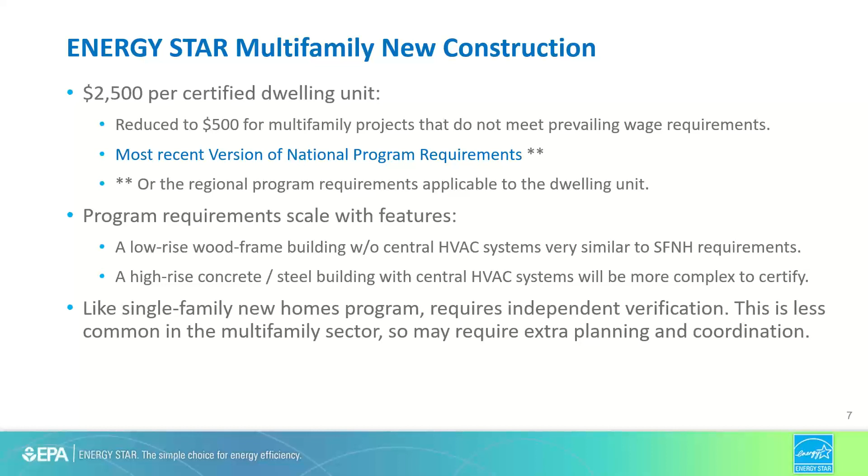The point is that the multifamily new construction program handles buildings across the entire spectrum of the sector. It's also worth noting that, like the single-family new homes program, the multifamily new construction program requires independent verification that our requirements have been met. However, this has historically been a little less common in the multifamily sector, things like measuring duct leakage, infiltration, ventilation airflows, and commissioning HVAC systems. So certification might require some extra planning and coordination than what project teams are used to.

Finally, let's touch on the manufactured home sector. These are homes that are built in the factory that are governed by the HUD code rather than site-built codes. New manufactured homes achieving Energy Star certification can qualify for the $2,500 tax credit. Again, homes have to meet the most recent version of the Energy Star program requirements. The current version for manufactured homes is version 2.

However, version 2.1 was recently proposed in response to the new federal conservation standards by DOE that are significantly more stringent than the prior code. The cornerstone of the proposal is a consistent, well-insulated envelope that outperforms the most stringent code insulation and window requirements by at least 25% for single-section homes and 5% for multi-section homes. In addition, multi-section homes have to choose one equipment upgrade package: an electric heat pump, a high-efficiency gas water heater and gas furnace, or a heat pump water heater package. We're currently reviewing stakeholder feedback and we hope to finalize this new version by the end of the year.

In the prior slides, we talked about how the tax credit is tied to National Version 3.1 and 3.2 for the single-family new home sector, depending on the year. That might be making you wonder exactly what's required to meet these versions, and that's what we'd like to talk about next.

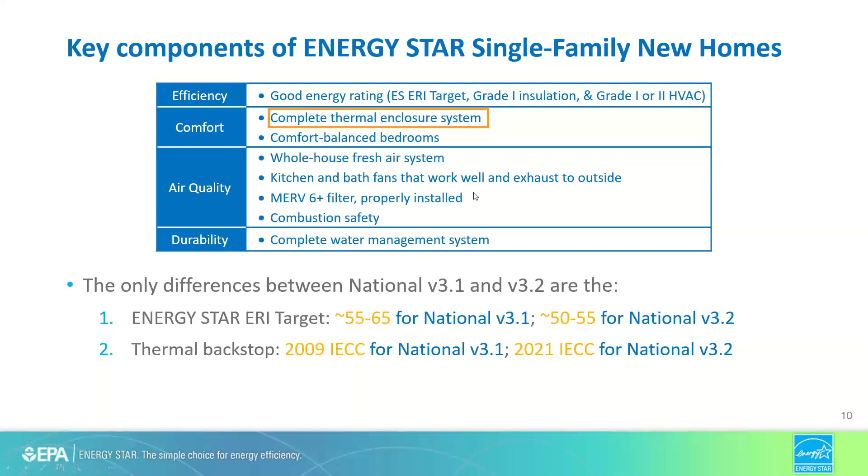Hey Dean, do you want me to take over if you're struggling? I'm still doing all right, but I might pass it off to you in just a minute, Asa. Okay, yeah, just let me know. Thanks.

It all starts with just doing a good energy rating. Simply put, you don't know what you don't inspect. By some estimates, more than 80 individuals representing over 24 trades will touch a home during its construction. Site supers have a lot to keep track of, and they're not always going to have the bandwidth to look at every durability and efficiency detail. And it certainly won't be the code inspector who's paying attention to all this. That's where an energy rater comes in. It's a critical extra set of eyes that should reduce the liability of a builder by keeping tabs on these sorts of details. In addition to visual inspections, it's the rater who has the equipment and the expertise to measure key features like infiltration, duct leakage, ventilation airflow, and installed HVAC performance.

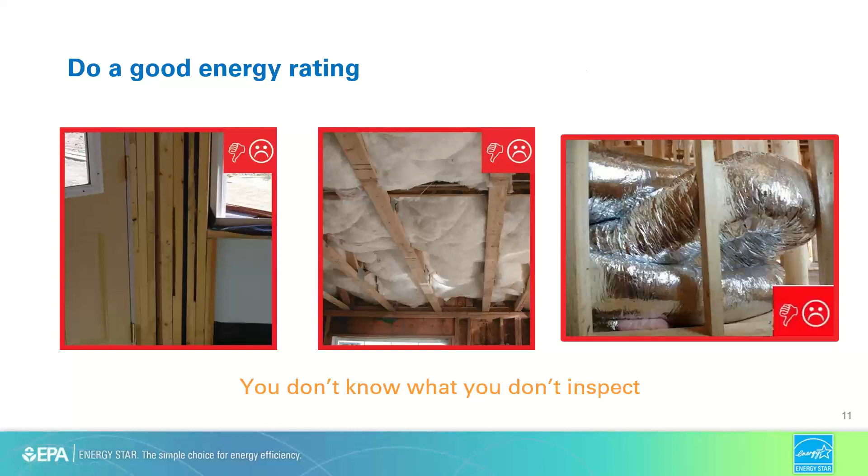So this is an easy but critical first step. Every builder can and should be doing an energy rating, otherwise you're just flying blind. Fortunately, we know that a lot of builders have taken this first step.

RESNET reported that close to 300,000 homes were rated in 2020 alone, and that number has only increased since then. Now we've got another 700,000 or so homes to go. But what this means is that 300,000 homes are already meeting this first requirement to reach certification just by doing an energy rating.

Now, an energy rating is just an assessment. So while it's a critical first step, it doesn't mean the home is good. A terrible home can get an energy rating, so it might get a score of 130. That's better than not knowing that it's 130, but it doesn't make for a good home.

A good energy rating means a decent ERI score. And that's why Energy Star defines an ERI target. Like I said earlier, aiming for something in the range of 50 to 65 will get you to Energy Star in almost every state in the country. And the average ERI of all rated homes last year was 58, squarely in that range. That means of those 300,000 rated homes, on average, more than half of them, or 150,000 or so, are probably already meeting the ERI target that's required for Energy Star certification.

What sort of measures allow you to hit the Energy Star ERI target? Well, a good place to start is by looking at the Energy Star reference design. These are the features that are used to set the target for each individual home. If you use all these features in your home, then by definition, you'll be pretty close to hitting the target. Remember though, if you see something here that you don't like, you can use other efficiency features instead, as long as you hit the target.

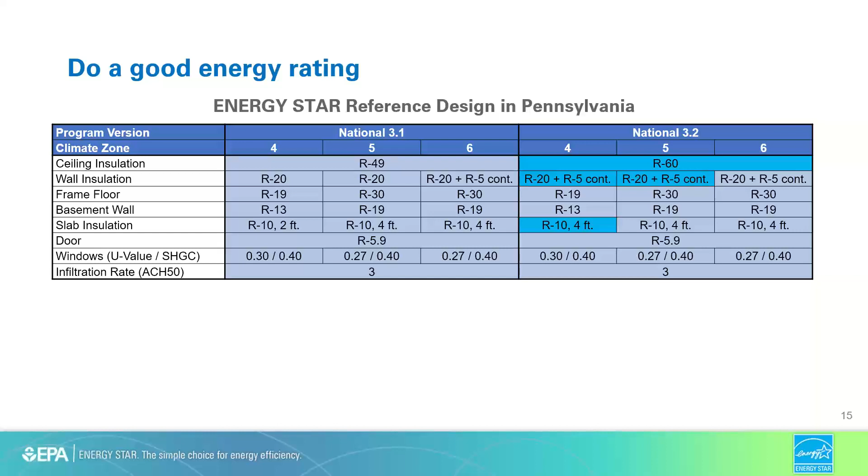So let's start with the enclosure. For National 3.1, the insulation is aligned with the 2012 IECC. For National 3.2, it's aligned with the 2021 IECC. The windows and doors are aligned with the latest Energy Star spec for windows and doors at the time that we created these versions, and the infiltration rate is 3 ACH50 across the board.

For the HVAC system, there's an increase in air conditioner efficiency with version 3.2 and some refinements to the heating equipment efficiency, both furnaces and heat pumps. These were generally aligned with the latest Energy Star product specification at the time the 2 versions were developed. And the equipment is paired with ducts that are in conditioned space and a programmable thermostat as well.

And finally, we have the water heater, which goes from a storage water heater in version 3.1 to either an instant gas water heater or a heat pump water heater in 3.2, plus Energy Star refrigerators and dishwashers, and an upgrade from 90% CFL lighting to 100% LED lighting in 3.2.

Now, I know that's a lot to take in, but just glancing at these specs might start to give you an idea of how close you are to hitting our performance targets. And remember, for the tax credit, version 3.1 is generally required until 2025, and version 3.2 is going to be required for 2025 and beyond.

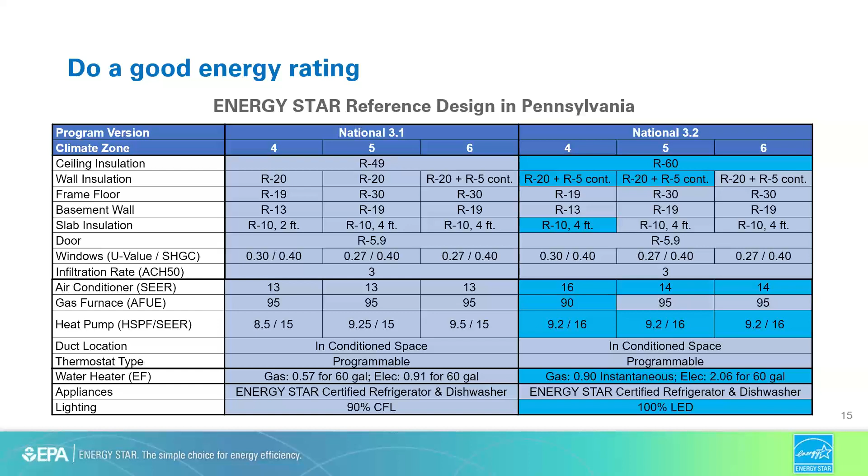Now, Standard 301, the standard for doing energy ratings, already has mechanisms to assess more than just the score alone, such as insulation installation grades. So to us, a good energy rating also means achieving grade 1 insulation installation.

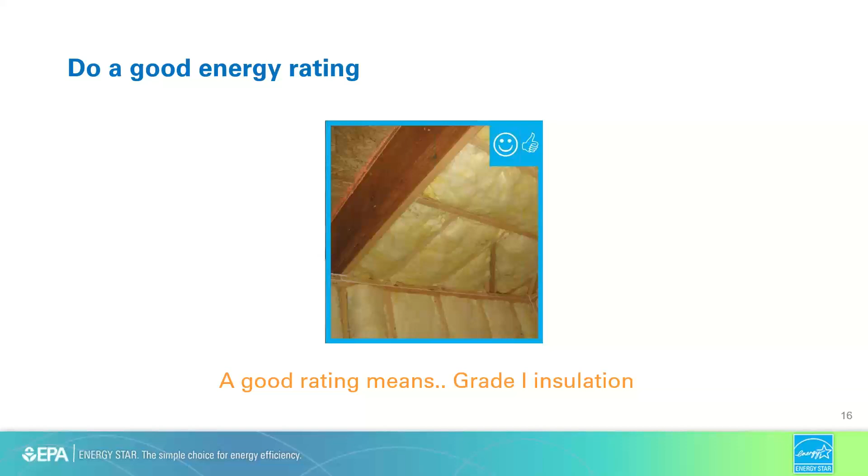This helps a builder get the R value that they paid for, and it reduces the chance of comfort complaints. If you're paying for, say, an R15 high density batt, then you should be expecting that your installers are actually delivering R15 performance, not installing it so poorly that you're getting something like R13 instead.

So that's really important. And now HVAC grading helps a builder ensure that their heating and cooling systems were properly designed and installed. A grade of 1 means that the system was installed really well. A grade of 2 means it was installed okay, so not great, but not terrible.

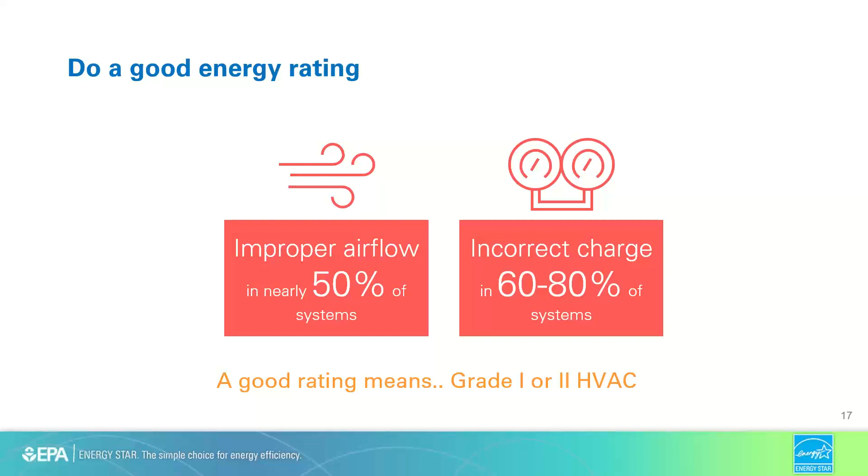This really shouldn't be taken for granted. Studies have shown that there's improper airflow in nearly 50% of systems, and incorrect charge in 60 to 80% of systems. So unfortunately, you can't just assume that everything is okay. You need to check.

Now, why should you care if airflow and charge are correct? Well, the first reason is that HVAC installation impacts efficiency. Consider a builder who's paid for a 16-SEER air conditioner. The SEER rating, based on a standard lab test, is never going to change, but the installation quality will impact the on-site performance of the equipment. A properly installed system will maintain that rated efficiency, meaning the home will get 16-SEER performance, whereas a poorly installed system will degrade that rated performance. The system is still rated 16-SEER, but the actual field performance might be closer to that of a 14-SEER system.

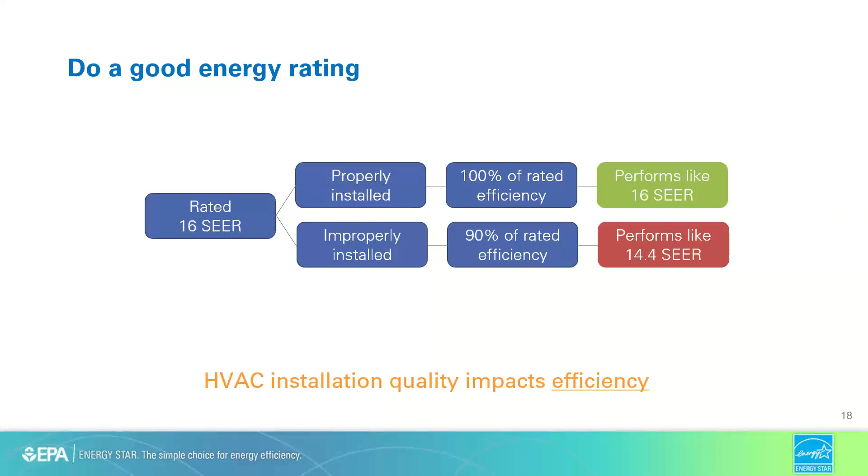So what does that mean? It means more energy and higher bills than what the builder paid for. And that's not even the worst part, because HVAC installation also impacts capacity. That means the amount of cooling or heating that a system can produce. In other words, the 3-ton system they paid for should actually deliver 3 tons of cooling capacity rather than 2.8 or 2.9 from a poorly installed system.

Now, a small change in capacity might not seem like a big deal, but tell that to the homeowner who calls you on the hottest summer day when you need every last bit of cooling power that was promised. So efficiency is great, but eliminating a comfort complaint or managing humidity better, that's priceless.

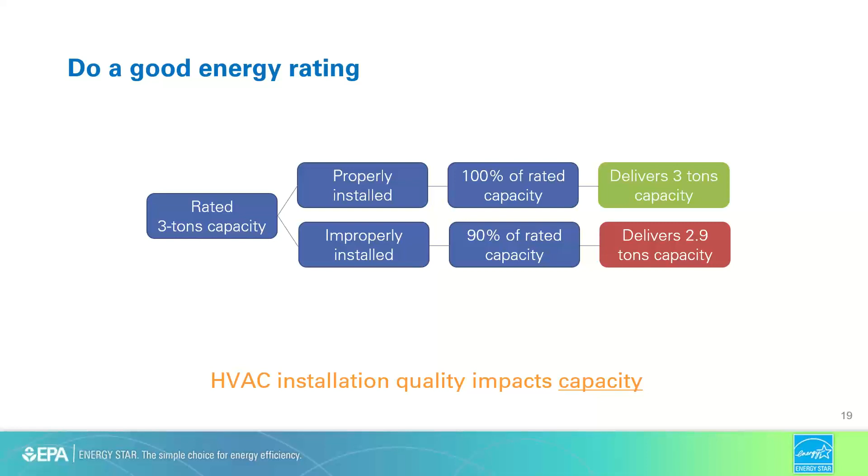It's because of these common installation defects and the impact that they have on performance that we helped spearhead the development of something called Standard 310, a standard for grading the installation quality of HVAC systems. And as you may know, there are 5 key tasks in this new HVAC grading standard. They include a design review, a total duct leakage test, a measurement of blower fan airflow and blower fan watt draw, and an assessment of refrigerant charge.

Doing these 5 tasks gives you a wealth of information about the HVAC system that can help save energy and reduce your risk as a builder or developer. But on top of that, HVAC grading makes it easier to certify ENERGY STAR homes and apartments in 4 key ways.

First, it integrates most of our ENERGY STAR HVAC requirements directly into a good energy rating, so there's less stuff that you have to do specifically for ENERGY STAR. Second, and this is a big one, for systems that are eligible to be graded, it doesn't require the use of a credentialed HVAC contractor, which has been a sticking point for some of our partners in the past.

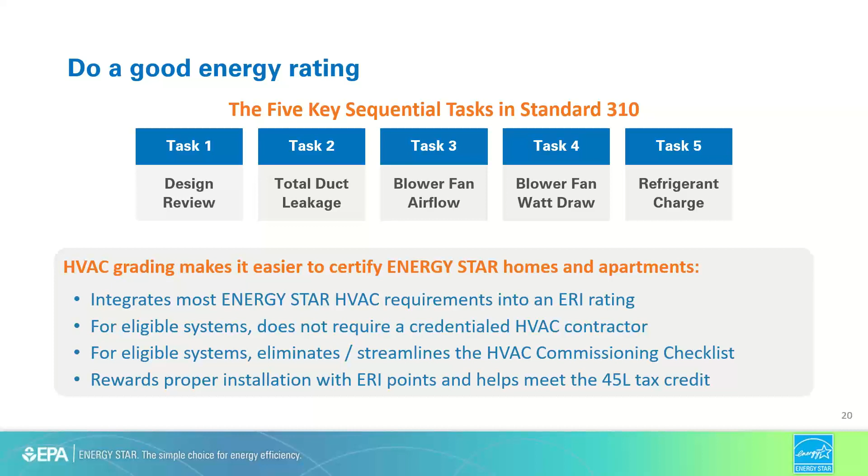Third, this also means that it eliminates the completion of the HVAC commissioning checklist. And finally, it rewards proper installation with ERI points, so that can help you meet the 45L tax credit.

So within ENERGY STAR now, we have 2 tracks for completing the HVAC design and installation requirements. There's what we call Track A, HVAC Grading, which uses this new standard. And there's our old requirements called Track B, the HVAC Credential Track, and that relies on the use of a credentialed HVAC contractor.

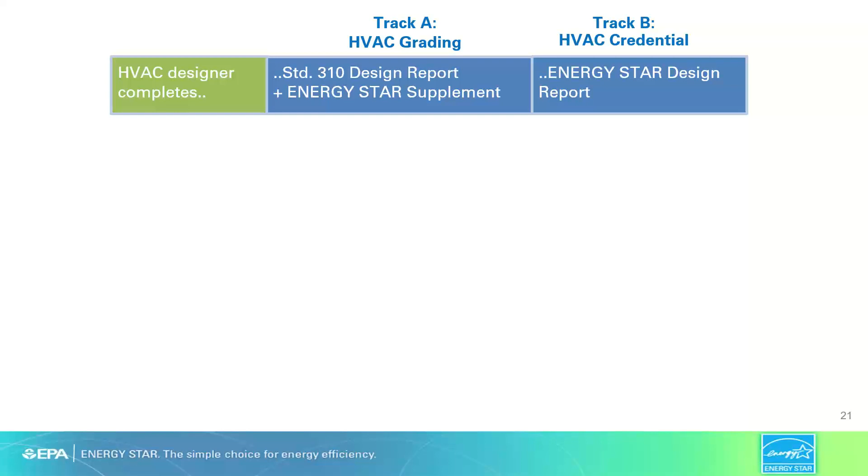Let me just compare these 2 tracks side by side. First, the HVAC designer completes their design report. For the HVAC grading track, they'll complete a standard 310 design report with an ENERGY STAR supplement. For Track B, they'll complete the old ENERGY STAR HVAC design report. Either way, the designer is filling out design documentation.

In both cases, the rater is going to complete the rater design review checklist, but in Track A, they'll do a comparison primarily using Standard 310. In Track B, they'll do the design review just according to our ENERGY STAR specific requirements. Also, just in Track B, the rater will have to verify that the contractor is credentialed, because that's a key part of that track.

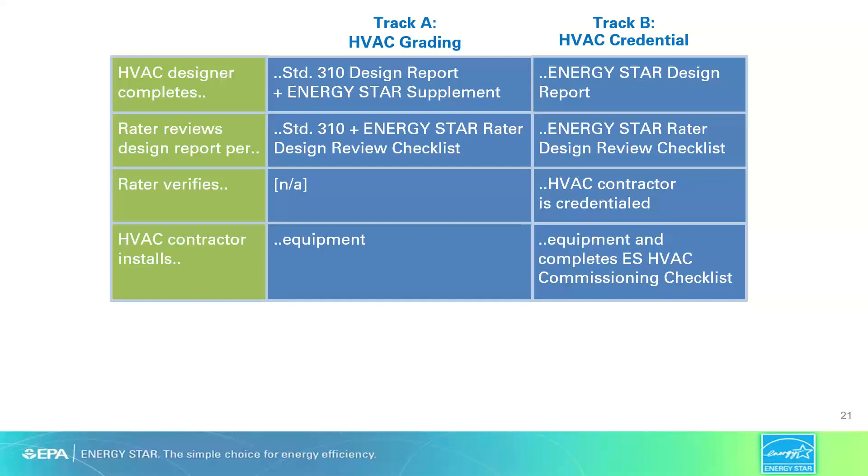Now let's move into the field. The HVAC contractor will install the equipment in Track A. In Track B, they'll do the same, but then they'll also complete the ENERGY STAR HVAC commissioning checklist. Again, that's just required for Track B.

For the rater, in both cases, they'll complete the rater field checklist. In Track A, they'll complete the total duct leakage test and 3 new field tasks, and they'll have to get certain grades. In Track B, they're going to verify total duct leakage limits as well, but then they'll measure the static pressure, and they'll have the option of collecting the HVAC commissioning checklist. Now, you can use either track to certify ENERGY STAR homes, but as we've been discussing, Track A integrates most all of these requirements directly into an energy rating.

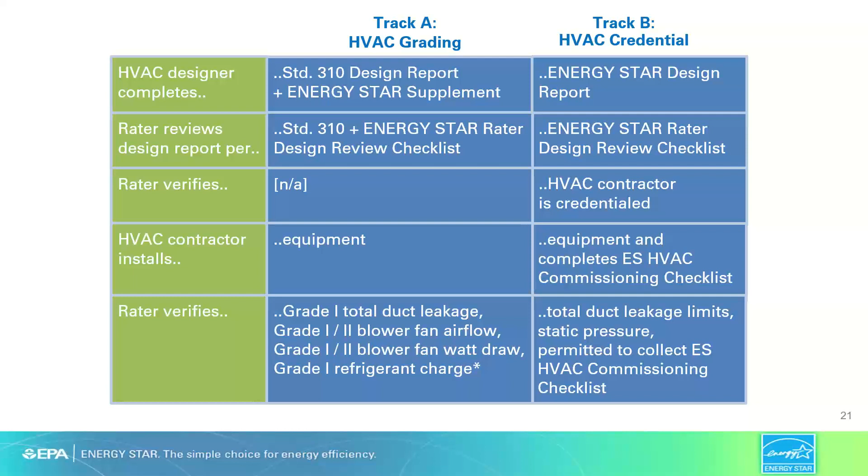Okay, so once you have achieved a good energy rating, a good ERI score, grade 1 insulation, and grade 1 or 2 HVAC, what does Energy Star add to this? Let me turn it over to Asa to answer that question.

All right, thanks, Dean. The last step is to include 7 building science-based features that help ensure that you don't sacrifice durability, comfort, or indoor air quality in pursuit of that ERI target. And chances are you are already doing some items on the list, so it really shouldn't be 7 fully new items. But including the full set of 7 features will help ensure you have a well-rounded, high-performance home.

So in other words, don't let your home skip leg day. If you take a home with an ERI of 130 and slap some PV on it, you can get a good ERI score, but that's not a well-rounded home.

So real quick, before we walk through the 7 features, let's play Mythbusters here and talk about what is not required, despite some common misconceptions.

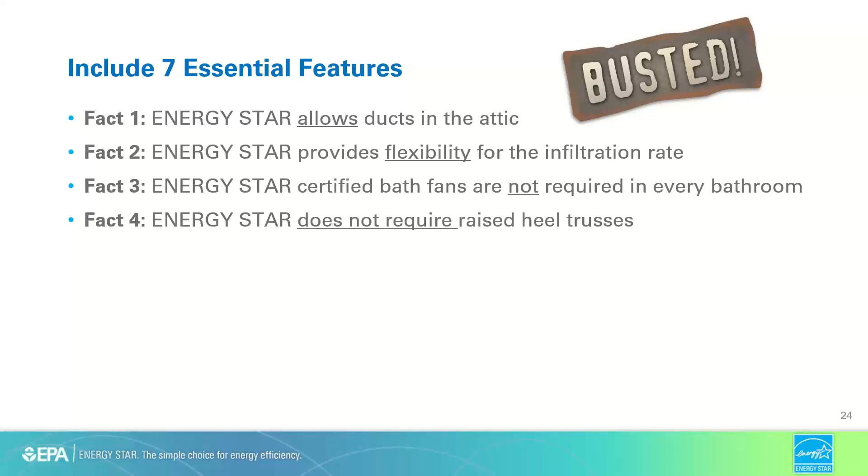Energy Star allows ducts in the attic. That's a tradable feature in the energy model. Same thing with the infiltration - there is no strict limit, it's tradable. Energy Star certified bath fans are not required in every bathroom, only when a fan is used as a whole house fresh air system. And while Energy Star does require insulation along the attic perimeter, the level is generally achievable without a raised heel truss. You can check out the tech bulletin on our website for full details. But the takeaway is that if any of these items were holding you up, we've got some great news.

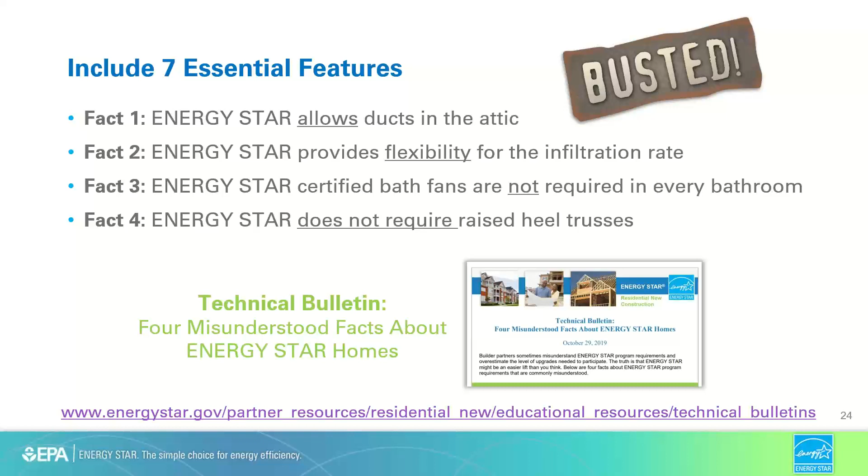Here's what actually is required, and let's start with an easy one. Each Energy Star certified home and apartment includes a MERV 6 filter or better in the heating and cooling system, which is going to remove contaminants from the air as it passes through.

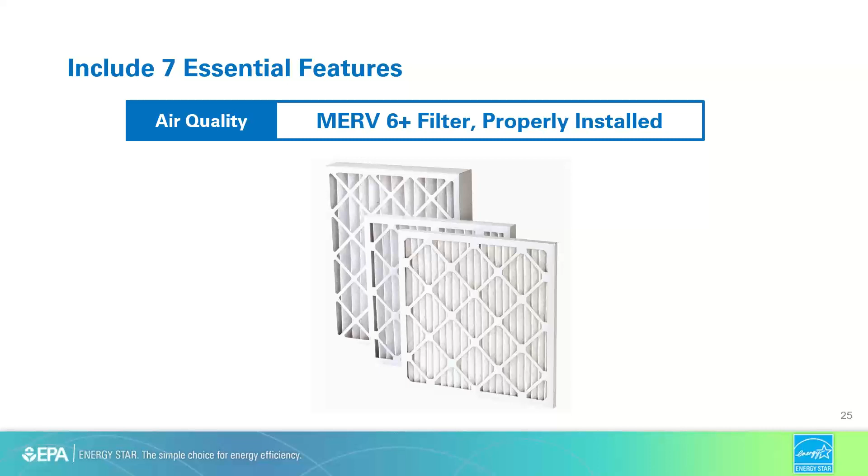Okay, hopefully pretty straightforward. Next is a durability feature, the water management system, which basically means proper flashing to keep bulk moisture draining away from the home. In other words, don't tuck your raincoat into your underwear.

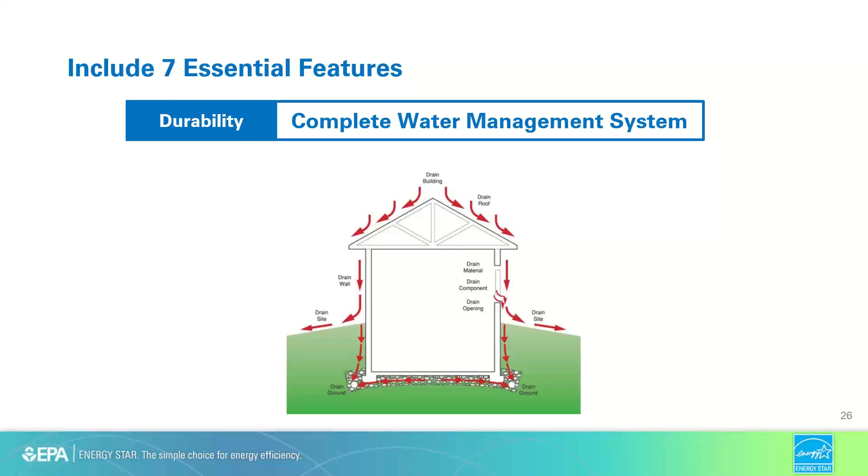Originally, years ago, this was a builder checklist, but at this point, we've completely eliminated the checklist and paperwork collection. It's simply a list of details for the builder to implement. And almost all of this is now baked into code, so it's not really asking even for anything additional on paper. But we know it's super important for high performance homes because leaks and other moisture issues can be so damaging. And in fact, many of our partners go above and beyond these requirements already, for example, by having third-party assessments.

Feature number 3 is combustion safety, which comes in a few different flavors: either power vented or direct vent appliances, combustion safety testing, or keeping the combustion appliances outside the home's pressure boundary, or just use the electric appliances that avoid the combustion issues altogether. Whichever strategy you choose, this is really just a question of due diligence to keep home buyers safe.

So let's pause. These first 3 features should be pretty much gimmies that you're already doing, but Energy Star is just double checking because they are just so important.

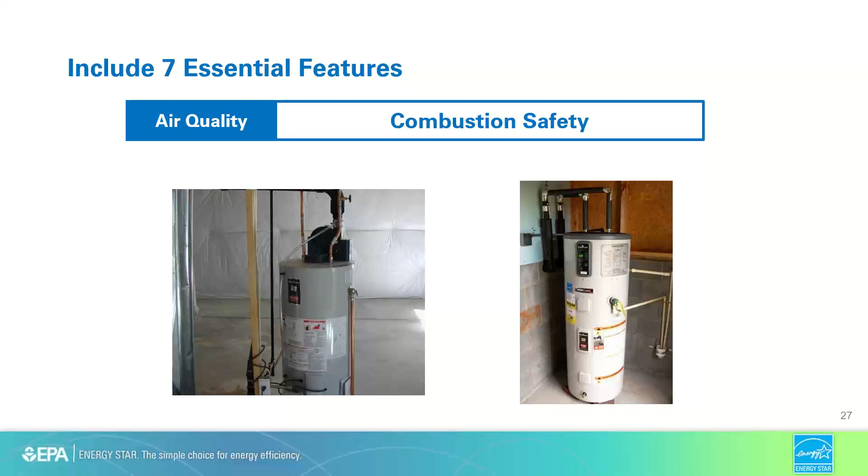Let's now move on to something that might be a little bit more of a learning curve, the complete thermal enclosure system.

You're almost there just by doing a good energy rating. You'll just need to do a few more things. We'll make sure there's enough insulation and windows to prevent problems. This is where the thermal backstop comes in, which is more stringent for version 3.2 than version 3.1.

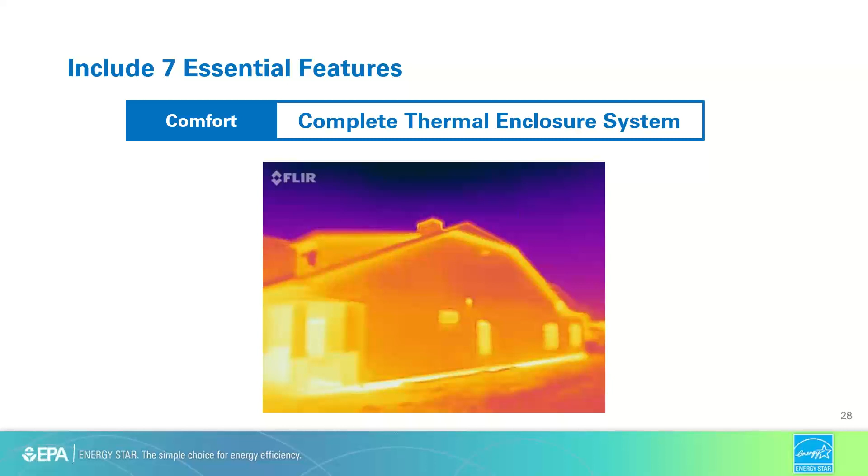For example, look at this infrared photo of a home without slab insulation. Now in Pennsylvania, you might be able to get a good ERI score without slab insulation, but you're going to end up with pretty cold feet.

Another part of the enclosure, and you'll already have this if you're doing a good energy rating, is grade 1 insulation. And then we'll make sure the obvious leak points are sealed, like around windows, exterior penetrations, attic hatches, and things like that.

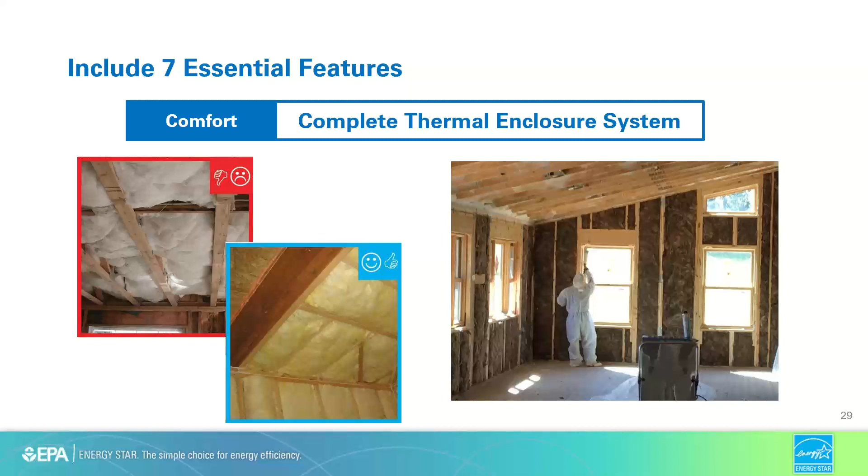There's one other detail of the enclosure that we focus on here, and that's the framing. I know it doesn't sound like much when it's spread out, but if you picture all those studs collapsed together, a standard wall is about 1/4 wood. You're basically building 75% of an insulated wall and 25% of a log cabin. And wood, of course, is not a great insulator, so that's a lot of area to lose heat through.

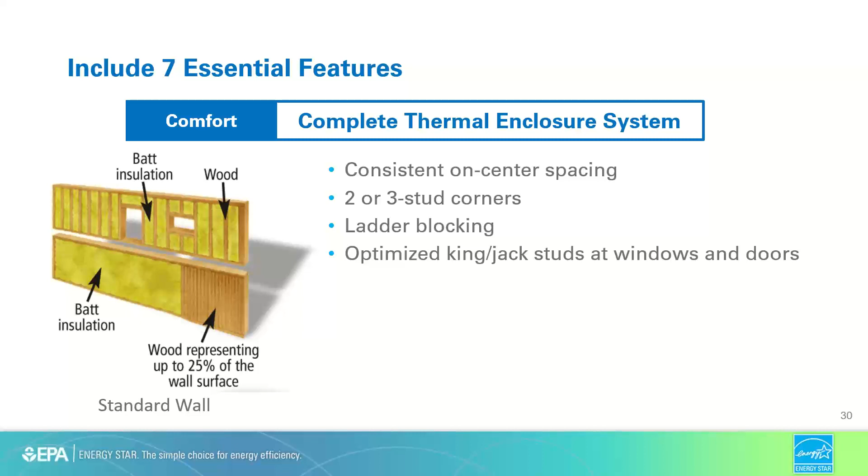But with some attention to consistent on-center spacing, 3-stud corners, ladder blocking, and things like that, we can bring that framing fraction down from 25% to about 19%. And that's a huge win, obviously, because that's less framing you'll need to buy.

So just to conclude this measure, most of this has been integrated into code by now anyway, but code inspectors don't always look for this stuff. Your energy rater is a real expert here, and they'll help you figure out which of these items might need a little tightening up.

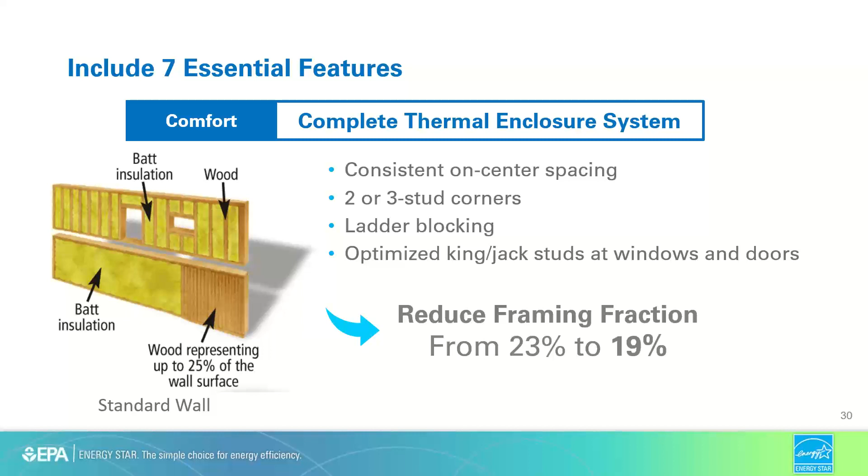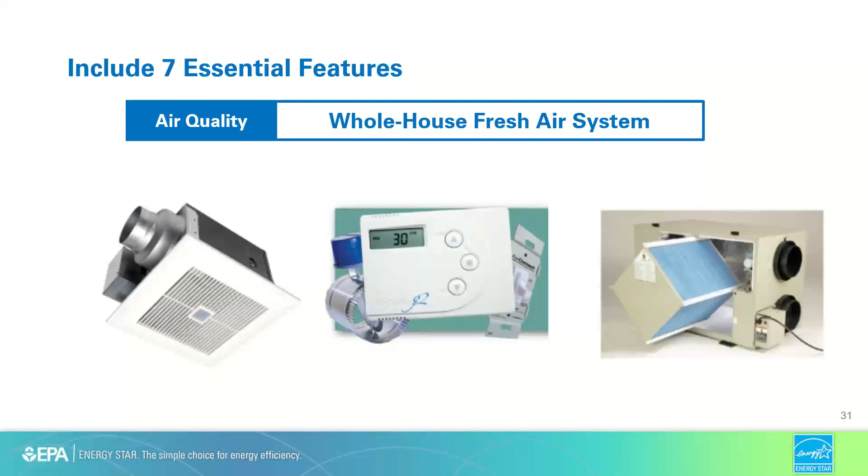And this is now required by nearly half of the states anyway, including, I believe, in Pennsylvania. And even where it isn't required, it's really something that you should be doing regardless for the health and comfort of your home buyers and occupants.

So that was bringing fresh air in. The other half of the air quality equation is taking the bad air out. And so we'll add vented exhaust fans in the kitchen and all full baths. Did you know that cooking creates contaminants like formaldehyde, ultrafine particles, fine particulate matter, and excessive water vapor? And you can include carbon monoxide and nitrogen dioxide to that list of pollutants if you're putting in a gas range or oven. You're really kicking up a lot of bad stuff into the air.

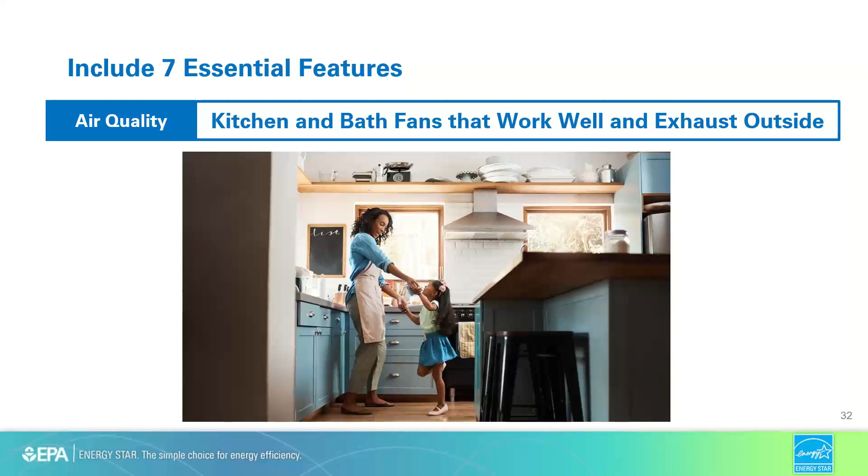There's a reason commercial kitchens have enormous range hoods with huge rooftop fans. And in the home, range hoods installed in recirculation mode just blow these contaminants back in your face. So although recirc hoods may look good, they aren't really doing anything. So we want these range hoods to be installed with ducts that go to the outdoors to get these contaminants out of the home.

And then the last feature are bedrooms that are comfort balanced. You know, homeowners spend more time in the bedroom than all other rooms combined. And when bedroom doors are closed, as they often are, air can become trapped. It's not enough to supply conditioned air to each bedroom. That air also needs a path back to the HVAC return side.

There's a variety of ways to create a return air pathway, such as a transfer grill, jump ducts, dedicated returns, or not as recommended, but maybe even just as simple as undercut doors.

You know, it reminds me of a builder who EPA worked with over the last 10 years who resisted this tooth and nail. They just didn't see the value. And then at some point, their in-house HVAC design team realized that their HVAC systems just couldn't work as expected without the return air path. So they incorporated them into all of their homes nationwide, even when they weren't doing Energy Star.

And actually, that same builder had a similar story with kitchen exhaust. They saw a presentation at our partner meeting one year on the latest cooking contaminant research, and it basically scared them straight. And so they've added vented range hoods to all of their homes as well.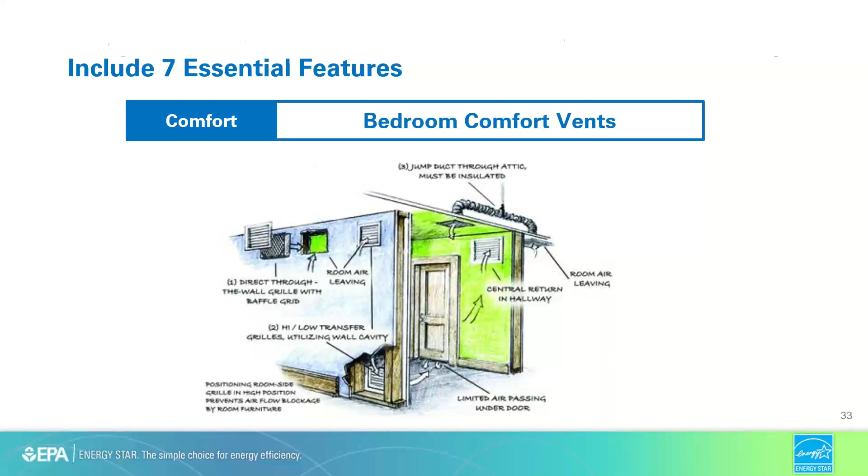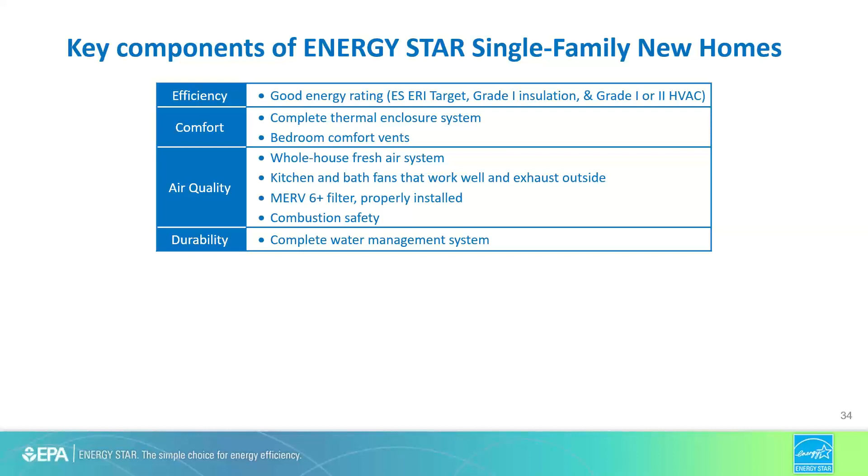So to summarize, if you're used to thinking of Energy Star as a stack of checklists, this really should change your perspective. It's really just a good energy rating and 7 essential features. And I say essential because which of these features would you tell your client to leave out? Which would you leave out of your own home? And just how difficult and expensive would it be to add these features at the time of construction?

So now that you know what is required, let's cover how to get started. If you want to view the full program requirements, you can do so by visiting energystar.gov/newhomes requirements. You can also learn more by viewing the recent webinars in our Energy Star Residential New Construction webinar series, which concluded just a few weeks ago. You'll find those by going to energystar.gov/newhomes webinars and clicking on recordings of Energy Star webinars.

And beyond that, perhaps the most important step for builders and developers is to find a rater so they can analyze how close your plans are to meeting Energy Star. They really are critical to helping you guide through the certification process. On our partner locator, you will find a list of qualifying raters who are eligible to certify homes and apartments to Energy Star. Once you've done that, you'll need to review and sign EPA's free partnership agreement to make you eligible to certify your homes.

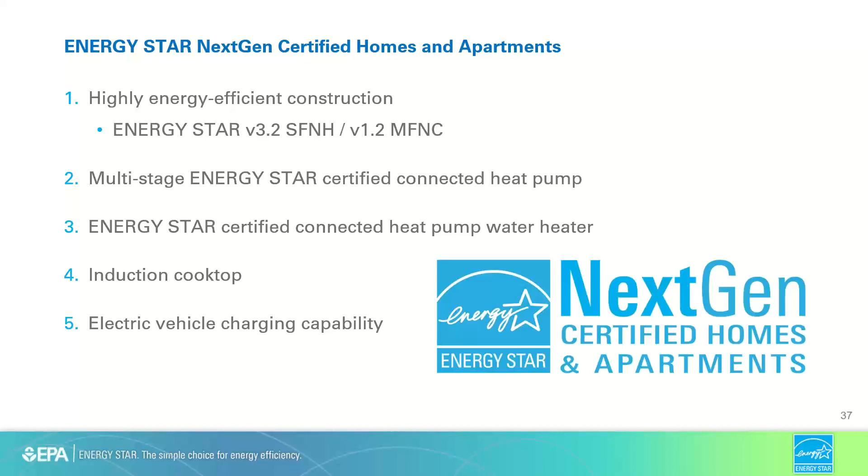And in case you're unfamiliar with why there's so much momentum around heat pumps, it's because these highly efficient technologies for space and water heating are the only realistic way to substantially reduce greenhouse gas emissions in buildings.

And in case you're wondering, doing the same analysis for heat pump water heaters will yield nearly identical results. So this is a blunt demonstration, but hopefully it helps answer any lingering doubts you have as to why Energy Star NextGen is so all in on heat pumps.

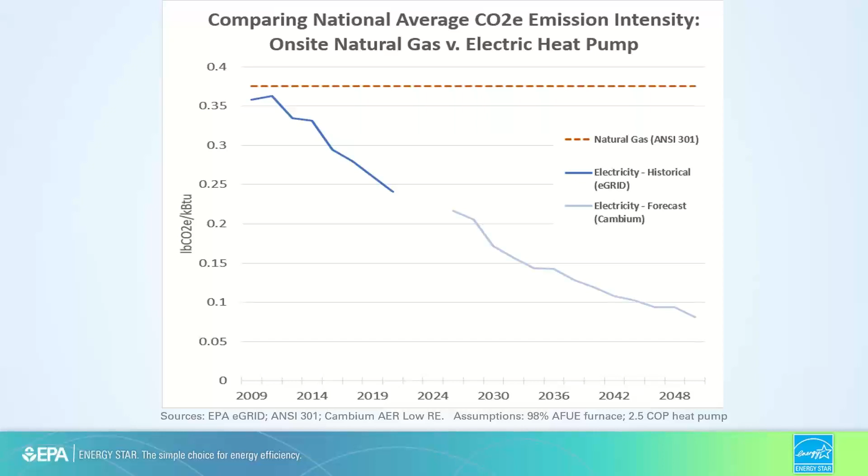So what can builders do to prepare for when the program launches in 2023? First, you can start by reviewing the program requirements that we finalized earlier this year. You can find them at energystar.gov/nextgenhomes, or on the main program requirements page on the Energy Star website. They currently reside in the one-page rater field checklist that I referred to earlier.

Dean mentioned that we've released some webinars recently. One of them covers Energy Star NextGen. You can review that presentation if you want to get into the weeds a bit more.

And I'd like to end by reinforcing that this is a new Energy Star label. It does not replace the core Energy Star program that has been around for 25 years, which is now called out in the 45L tax credit. Our intent is to provide a national platform where builders, product manufacturers, utilities, and policymakers can all come together to promote a pragmatic approach to achieve these significant operational emissions reductions.

Finally, here's some helpful links and our contact info.